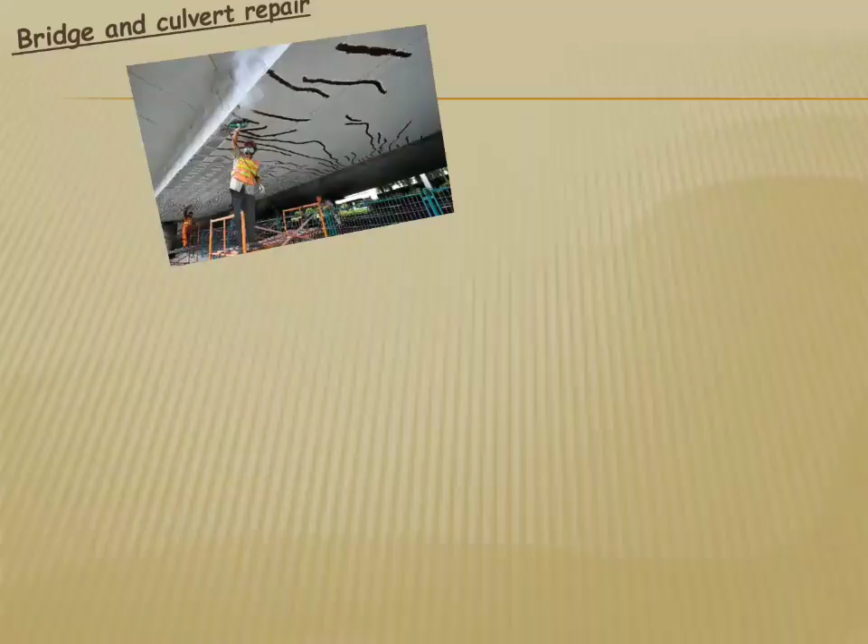Today's topic is bridge and culvert repair. The objective of this topic is cracks and spalling in the structural members, cracks and spalling from the railings.

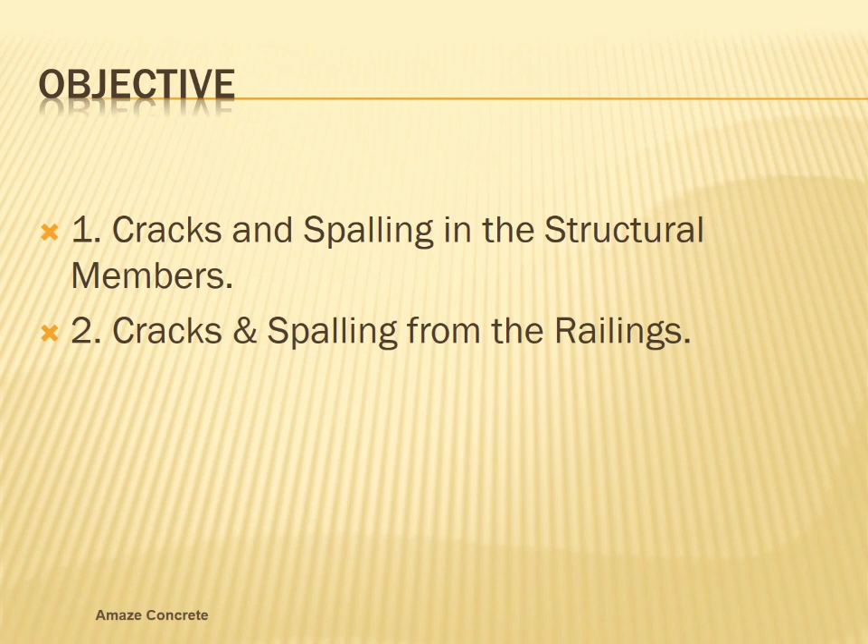The total system of repair work of the building consists of the following steps. First step is surface preparation, then pressure grouting to fill up all the voids in the substrate if required. Third one is injection grouting to fill the cracks. Fourth, application of general purpose non-shrink cementitious microconcrete. And fifth, application of structural grade repair mortar.

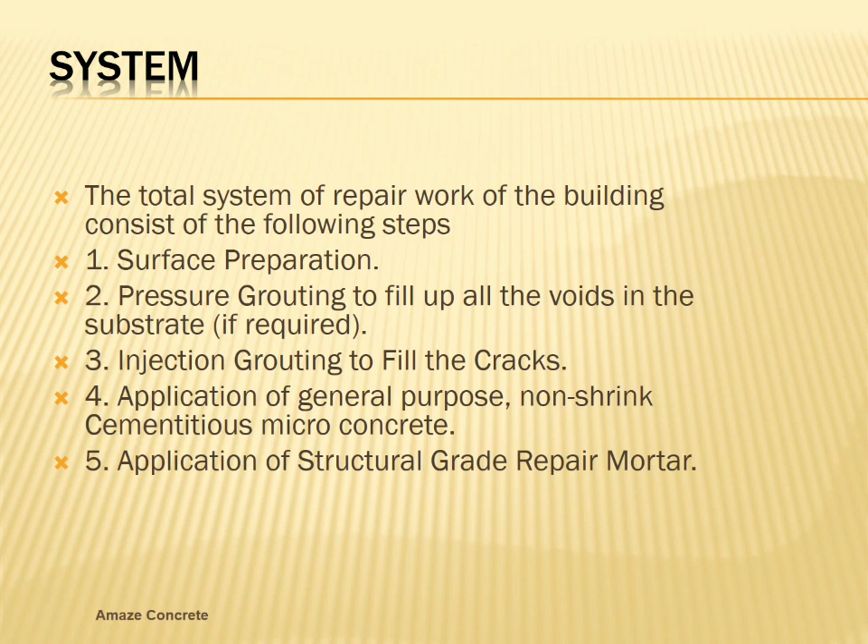The first step is surface preparation. The concrete surface should be thoroughly abraded to remove all laitance, any trace of loose plaster, oil, grease, and any other materials that might affect adhesion are to be removed by wire brushing the surface. The entire surface shall then be washed thoroughly with plenty of water and then allowed to dry.

Defective concrete surfaces must be cut back to a sound base. Smooth surfaces should be mechanically roughened. Corroded reinforcement should be completely exposed along its full circumference and cleaned to remove all loose scales and corrosion deposits. Grit blasting is recommended. One coat of primer should be applied on the reinforcement.

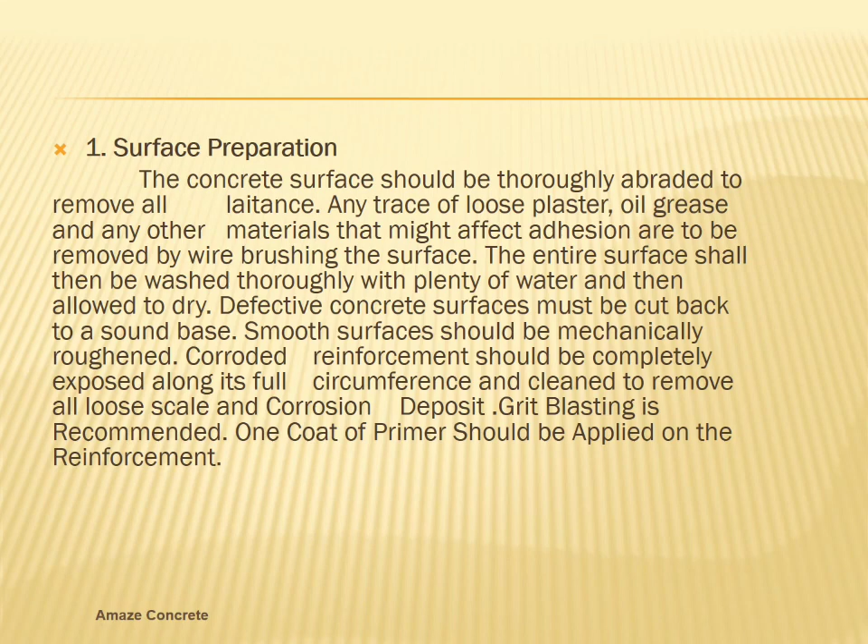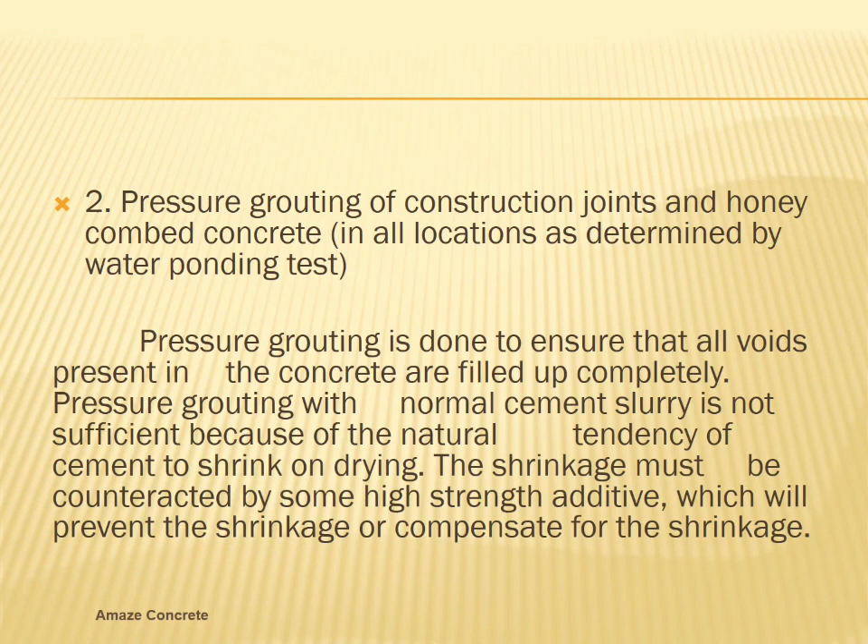The second step is pressure grouting of construction joints and honeycomb concrete in all locations as determined by water ponding test. Pressure grouting is done to ensure that all voids present in the concrete are filled up completely. Pressure grouting with normal cement slurry is not sufficient because of the natural tendency of cement to shrink on drying. The shrinkage must be counteracted by some high strength additive which will prevent the shrinkage or compensate for the shrinkage.

Epoxy resin grout possesses the following advantages. Excellent durability; high compressive, flexural and tensile strength ensure a long working life; cost effective, high early strength promotes minimum downtime and early commissioning of plant; user friendly, simple full pack mixing to ensure that the performance characteristics are achieved; versatile, suitable for a wide range of loading situations including repetitive dynamic loads; excellent in-service performance; non-shrink capability ensures a full surface to surface contact.

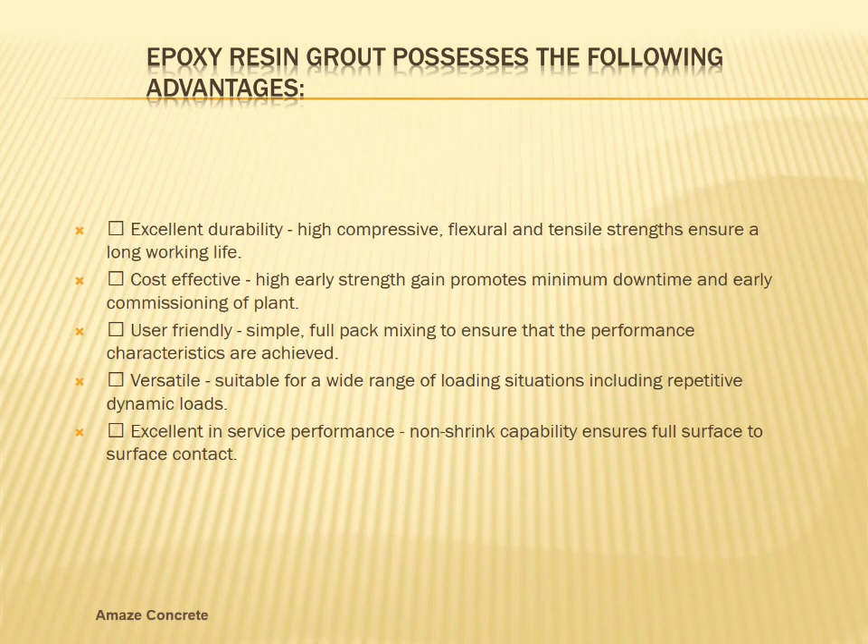The procedures are: drill 18 dia holes in the concrete using pneumatic drill in a grid pattern at required spacing as per site conditions, but in no case exceeding 1 meter center to center. The depth of the drilling shall be adequate to pump the grout to the intended location in predetermined areas. PVC nozzles shall be fixed in the holes drilled using single component rapid setting compound. The entire contents of the hardener can should be poured into the base container and mixed for 2 to 3 minutes or until uniform color is achieved. It must be used within the specified pot life.

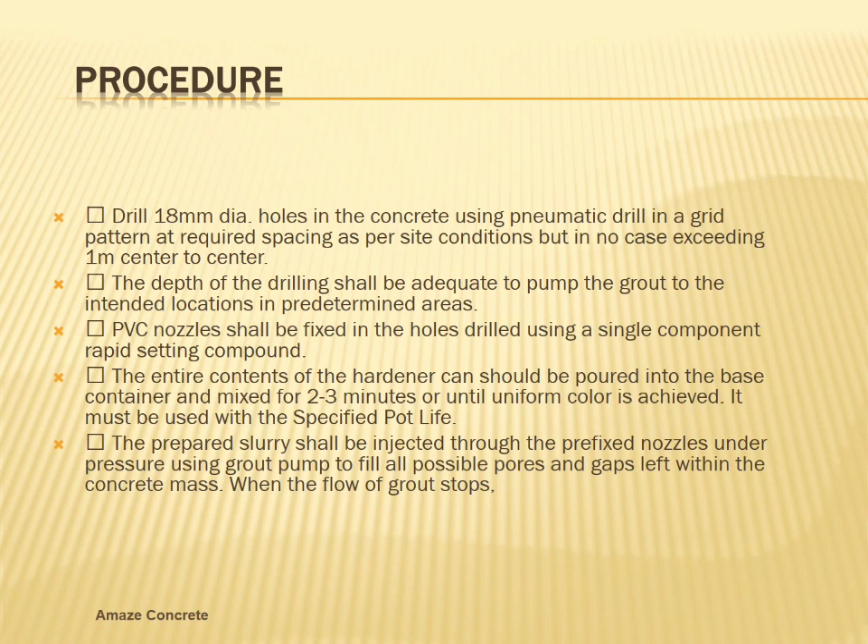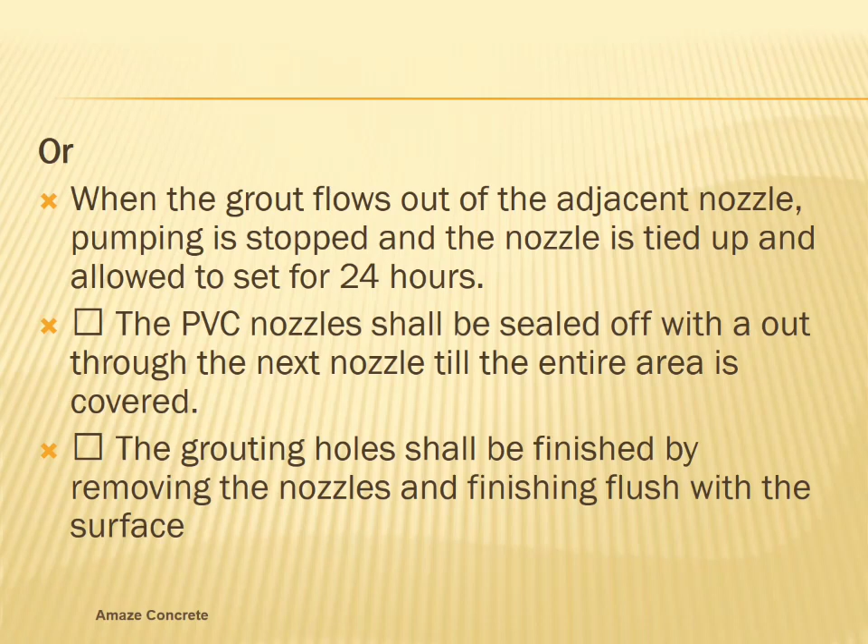The prepared slurry shall be injected through the prefixed nozzles under pressure using grout pump to fill all possible pores and gaps left within the concrete mass, until the flow of grout stops. Or the second alternative procedure may be when the grout flows out of the adjacent nozzle, pumping is stopped and the nozzle is tied up and allowed to set for 24 hours. The PVC nozzle shall be sealed off, grouting through the next nozzle till the entire area is covered. The grouting hole shall be finished by removing the nozzles and finishing flush with the surface.

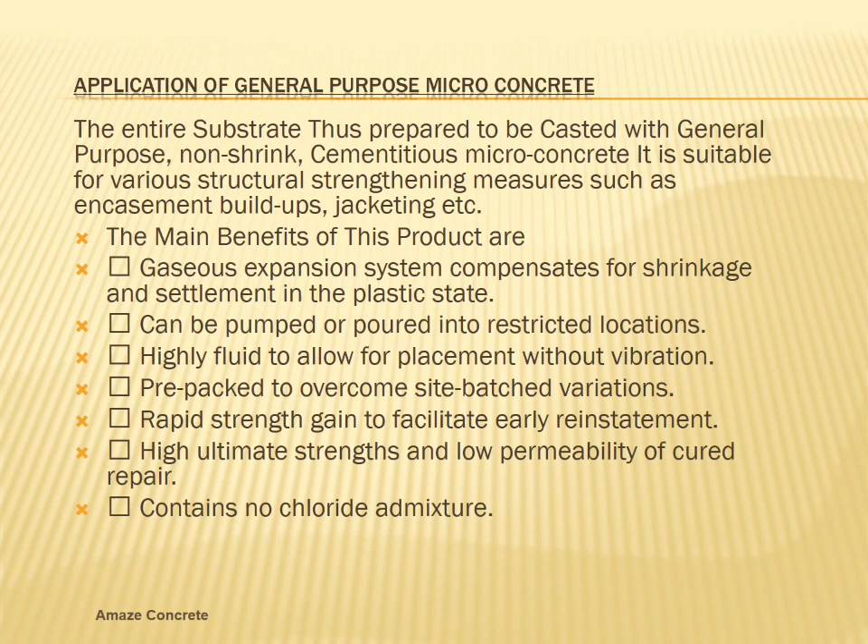The procedure: the site addition of clean water produces a free-flowing, non-shrink repair microconcrete. The material is based on Portland cement, graded aggregates, fillers and additives which impart controlled expansion characteristics in the plastic state while minimizing water demand. The unrestrained surface area of the repair must be kept to a minimum. The formwork should include drainage outlets for pre-soaking and, if beneath a soffit, provision for air venting. Provision must also be made for suitable access points to pour or pump the mixed micro-concrete in place. Several hours prior to placing, the concrete substrate should be saturated with clean water. Immediately prior to placing, any free water should be removed.